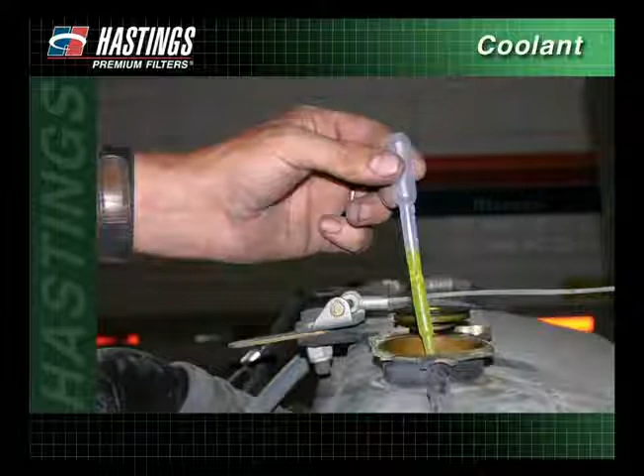To test the level of protection within the coolant, collect a coolant sample from the radiator or petcock. The coolant must be between 50 degrees and 130 degrees Fahrenheit when tested.

Remove one strip from the bottle and replace the cap immediately. Do not touch the pads on the end of the strip. Discard the kit if the unused strips have turned brown.

Dip the strip into the coolant sample for 1 second. Remove and shake the strip briskly to remove excess liquid. Wait 45 seconds after dipping the strip, then compare and record the results in the following order.

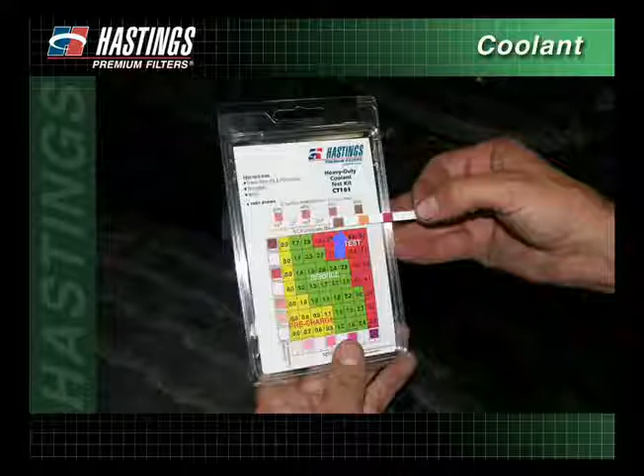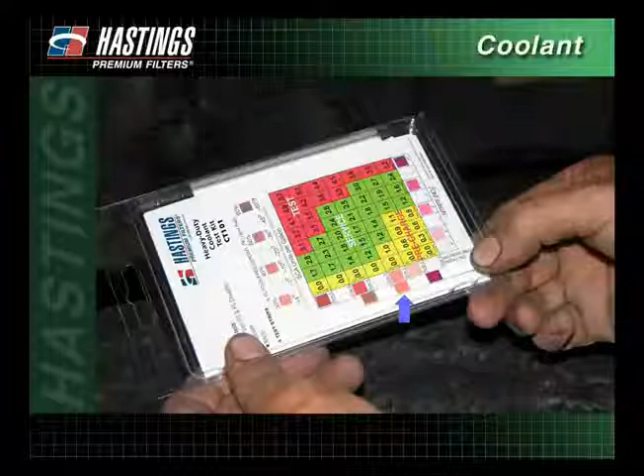Compare the freeze point, the end pad, to the color chart and record the results. Next, compare the sodium molybdate, the middle pad, to the color chart and record the results. Finally, compare the sodium nitrite, the bottom pad, to the color chart and record the results.

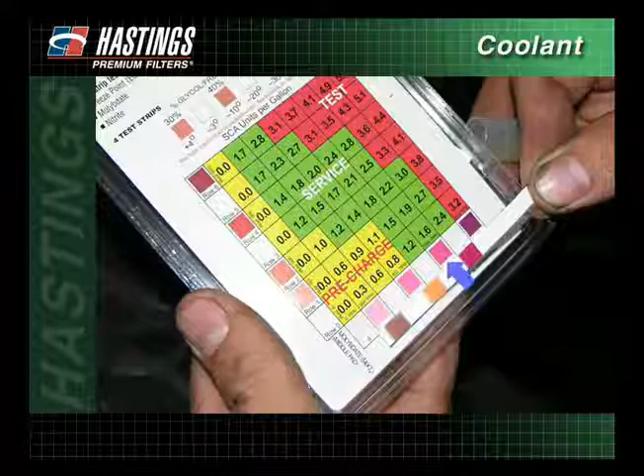All three readings must be completed within 75 seconds after dipping the test strip. It's okay to estimate a value between the color blocks. If uncertain about the color match, estimate towards the lighter color block.

Determine on the chart in which color zone the sodium molybdate level intersects the sodium nitrite level, and follow the treatment instructions shown on the chart.

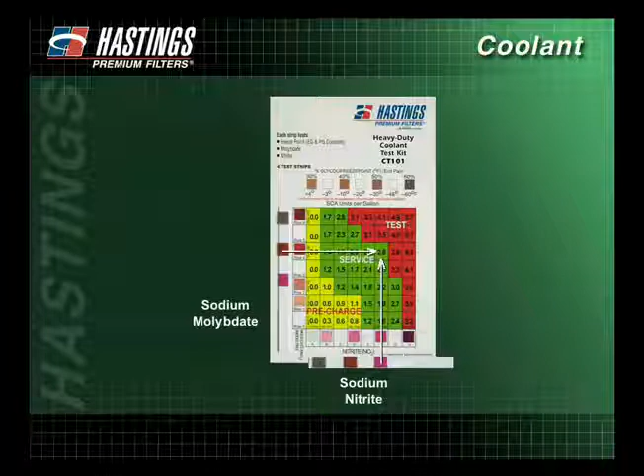If using BTE, there will be no change on the sodium molybdate pad. In this case, refer to row 0 on the chart. All results should be recorded on a maintenance record for future reference.

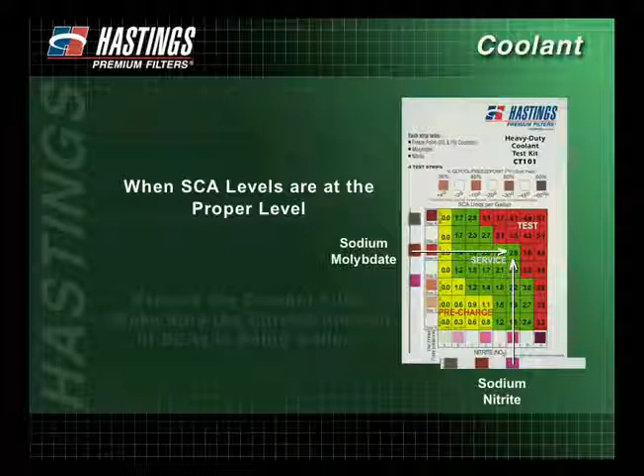If the SCA levels are at the proper level and fall into the green or the service area of the chart, replace the coolant filter. Make sure the correct amount of SCAs is being added.

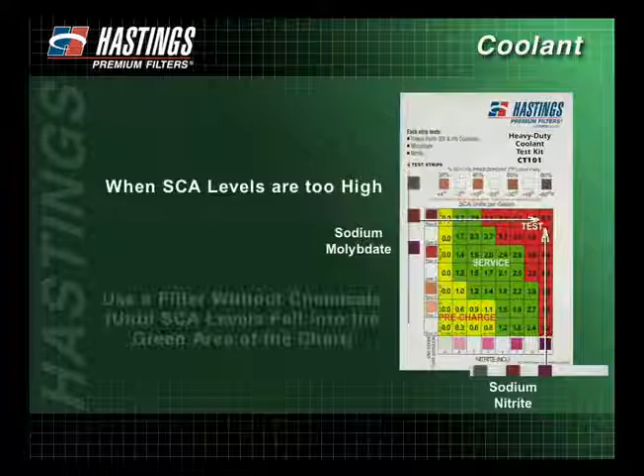If the SCA levels are too high and fall into the red or the test area of the chart, use a filter without chemicals until the SCA levels fall into the green area of the chart.

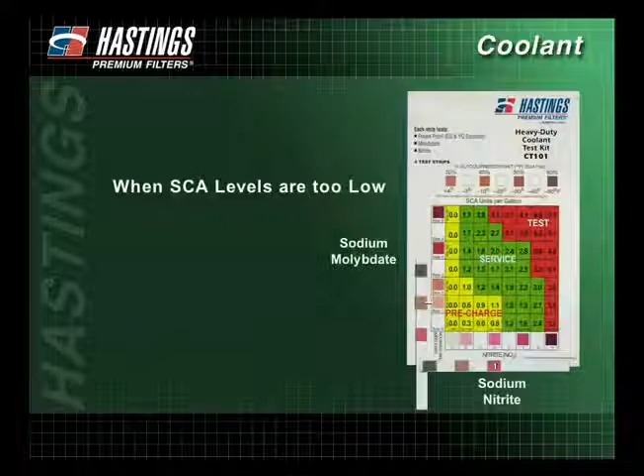If the SCA levels are too low and fall into the yellow or the pre-charge area of the chart, replace the service filter and add liquid SCAs to bring the coolant up to the proper SCA levels.

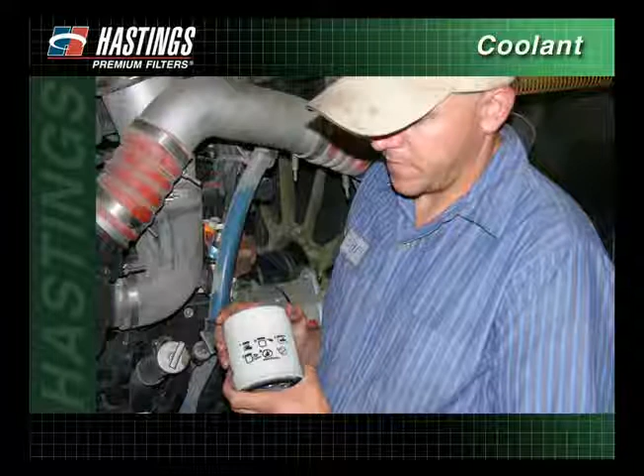After testing the coolant for proper SCA levels, it is important that correct installation procedures are followed. When changing spin-on coolant filters, pictograms on the filters themselves show the proper installation procedures.

When servicing a coolant filter, first close the coolant shutoff valve to prevent coolant spillage. Next, unscrew and remove the old filter, making sure the old gasket is also removed. The use of a filter wrench may be required.

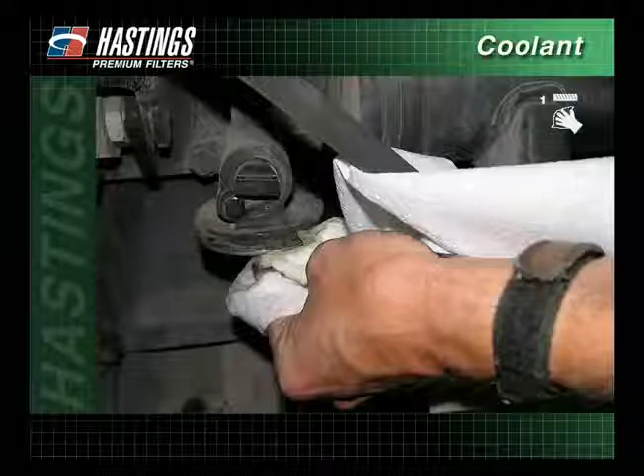Wipe the filter mounting base with a clean cloth to remove any contaminants. Remove the protective shrink wrap from the new filter. Check to make sure the gasket is in place and inspect the filter for dents. Filters that are dented prior to or during installation should not be used.

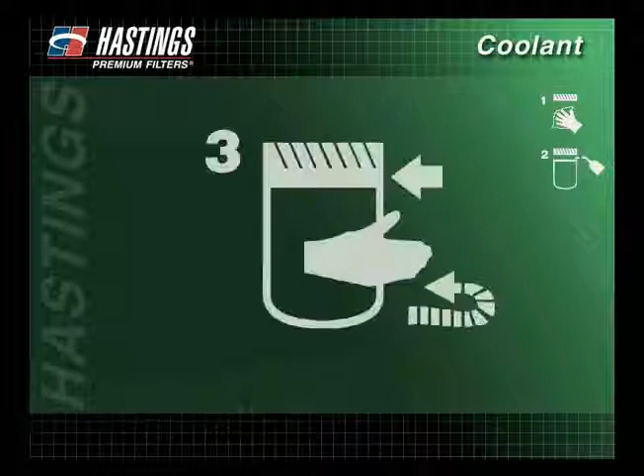Apply a thin film of clean motor oil to the filter gasket. Do not use grease. Line up the threads on the filter with the threads on the mounting base carefully to avoid cross-threading.

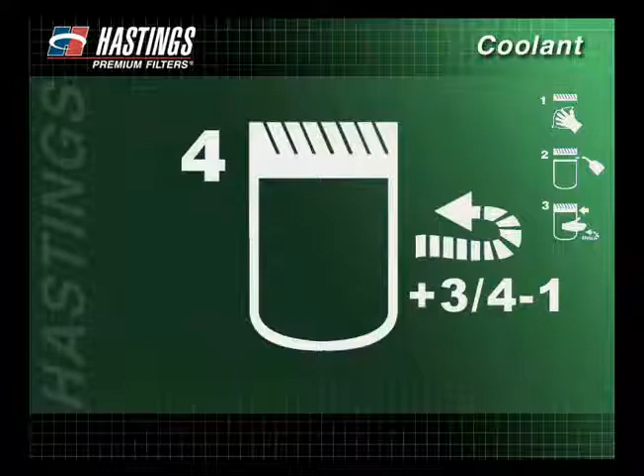Screw on the new filter until the gasket comes into contact with the base. Follow the instructions of the filter manufacturer for final tightening. The pictogram on the filter will tell how many additional turns from gasket contact the filter requires.

If the filter cannot be hand tightened to the proper torque, Hastings recommends using a filter strap wrench. Place the wrench near the base plate of the filter to avoid damaging the filter during installation.

Using a filter wrench other than a strap wrench is not recommended, as some filter wrenches incorporate metal pins designed to help remove the filter. These pins can dent a new filter, which could cause the filter to leak.

A coolant filter that is not properly tightened to the manufacturer's recommendations may cause the filter to come loose and leak. Open the coolant shutoff valve. Then start the engine and check for leaks.

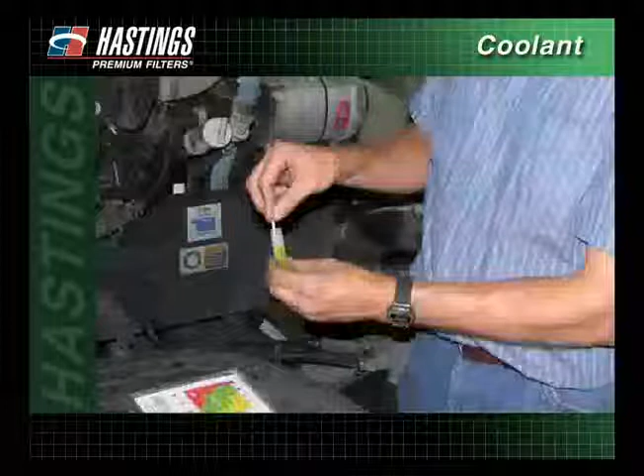Again, check the filter for leaks. Once the filter has been changed and the recommended treatment has been followed, run the engine to allow the SCAs to dissolve and cycle through the cooling system.

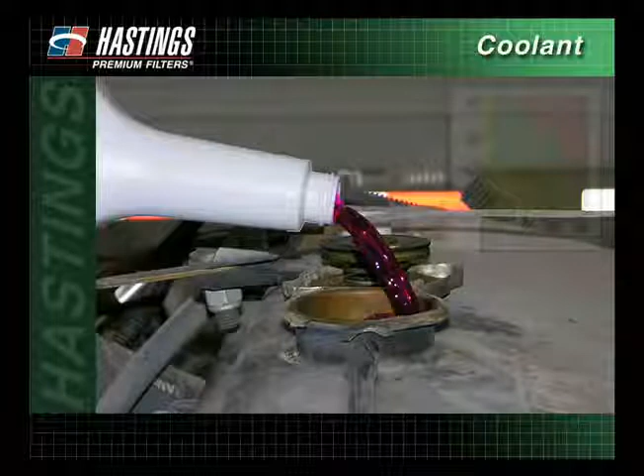Then collect a new coolant sample and test with a new coolant test strip and record the results. If the SCA levels are still low, continue to add additional SCAs until the test results fall into the green or the service area of the test chart.

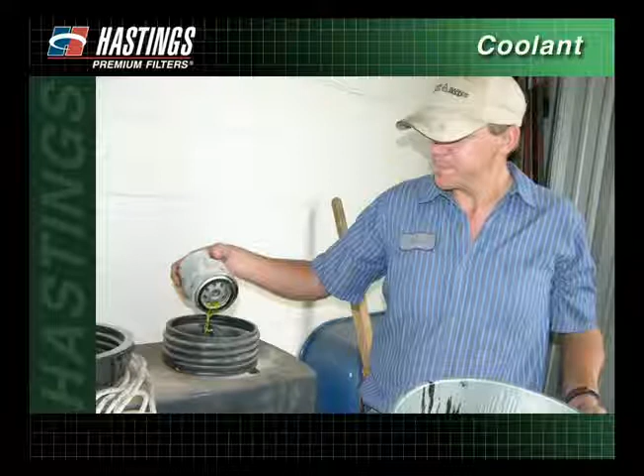Remember, when disposing of used coolant filters and coolant liquid, follow all environmental regulations in your area.